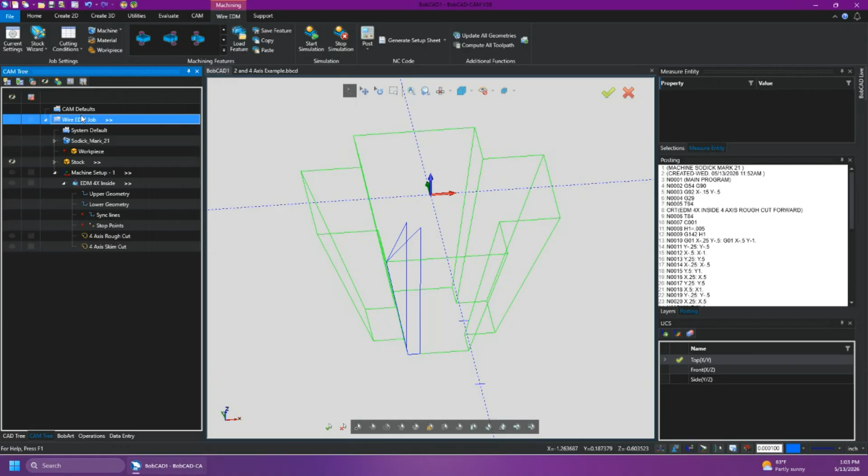Starting with 2-axis wire, things can be pretty straightforward. So if we just set up our geometry right on Z0 here, we can customize this a little bit. I'll say something like that. Go ahead and hit OK. For 2-axis wire jobs, even if you're cutting a tapered job, this is sufficient geometry to go get that set up.

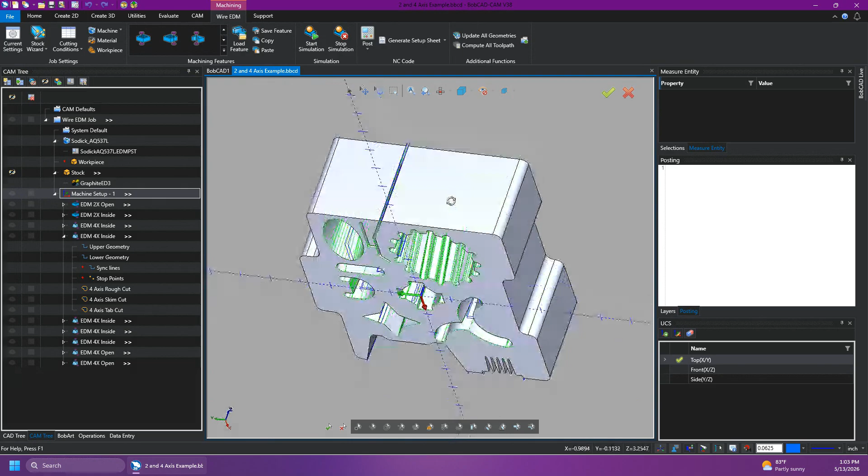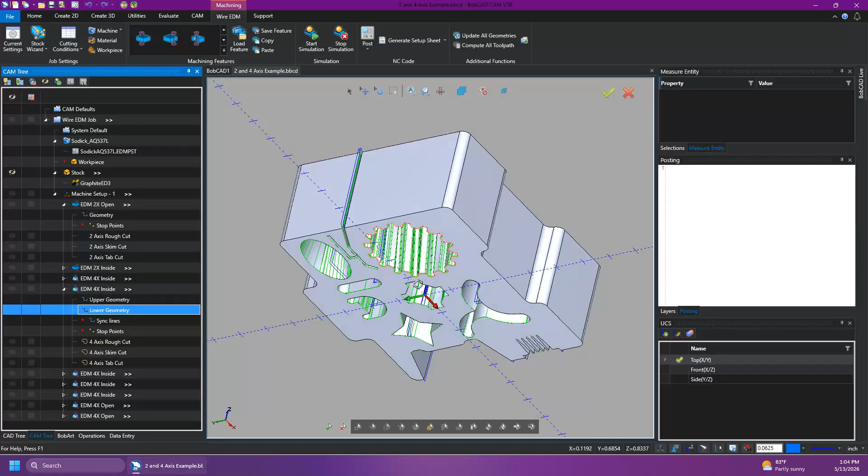You don't really need a full solid model for setting up a wire EDM job. Sometimes it's helpful to have that, so you could pull chain geometry from the top and bottom edges. If we're looking at the stock here, it represents our block, same thickness and everything. But when you're setting up these parts, 2-axis is just 2-axis geometry. It's a single chain on one flat plane, whereas on 4-axis you have upper and lower geometry. So sometimes having a solid so you could use something like extract edges and pull geometry from an existing solid can be helpful, but in this case, starting with a 2-axis example, this is really all we need.

So we can get started with setting up our wire job. Go to new job, select Wire EDM. Let's go select our Mitsubishi FA series just for fun here.

We'll go to our stock wizard. We don't have a workpiece to select. This is something that in tech support calls people ask me quite a bit about. You'll notice right now I can't really go and select anything, and that's just because this workpiece selection is looking specifically for a solid model. This is useful when you're setting up simulation - you can kind of see the deviation between what the solid model looks like and what the actual toolpath is going to do to that part. Right now we don't have a workpiece to select, so we'll skip past that.

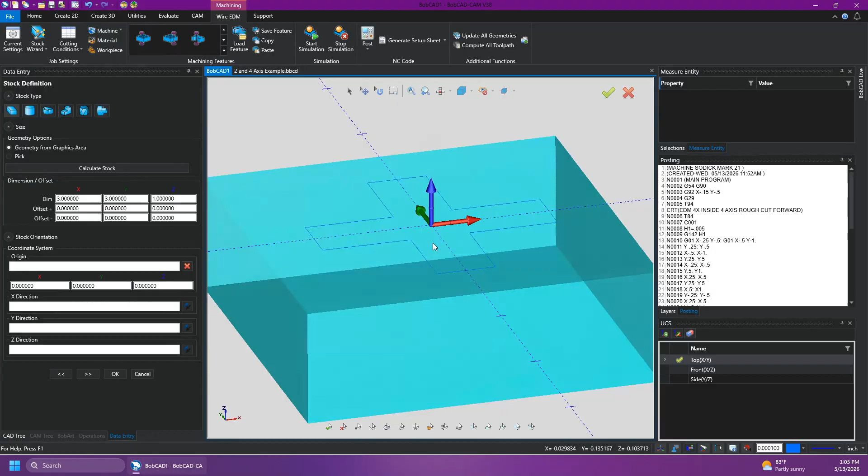We'll set up our stock. Let's go a little bit over. We'll do some different things in here. We'll make it an inch thick, that'll work for me just for this example part. We'll get to this more exciting example of a solid model later - obviously you can see this is a little bit more feature rich, but just getting started with 2-axis, like I said, you really don't need anything too crazy. You can just stick with this 2-axis wireframe geometry or 2D wireframe geometry.

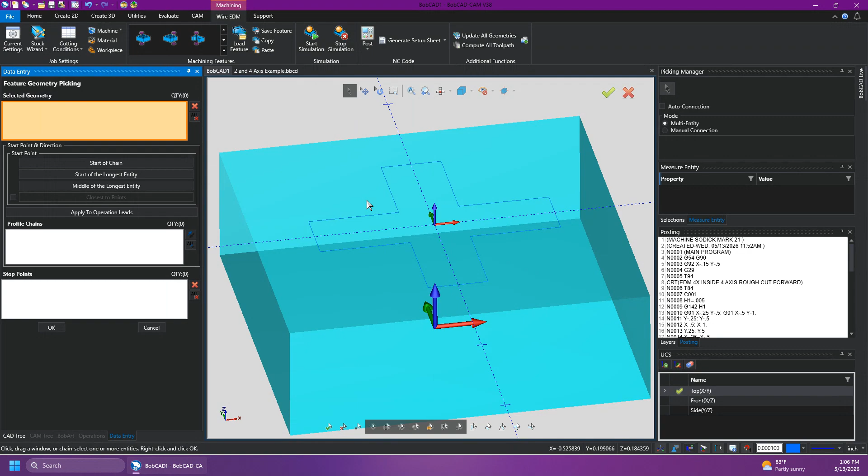And we have our feature geometry picking here. Now this is where if you're kind of used to the software, what I'd call a seasoned user, an old school user - before our picking manager existed, we would hold shift and click on an entity and it would pick everything, versus right now if I just go ahead and click on that while not holding shift, we're just getting single entity selection. This can be confusing if you don't know what you're looking at here. So we also have this picking manager right here, and this will allow you to either auto connect chained geometry, which usually just means it's touching in some way.

So if I click that, it goes ahead and picks the whole thing, and I didn't just hold shift to do that. Most of the time I run this without that on, just because I've used the software long enough to get used to shift clicking. And your picking manager should always kind of remember the state that you last used it as well.

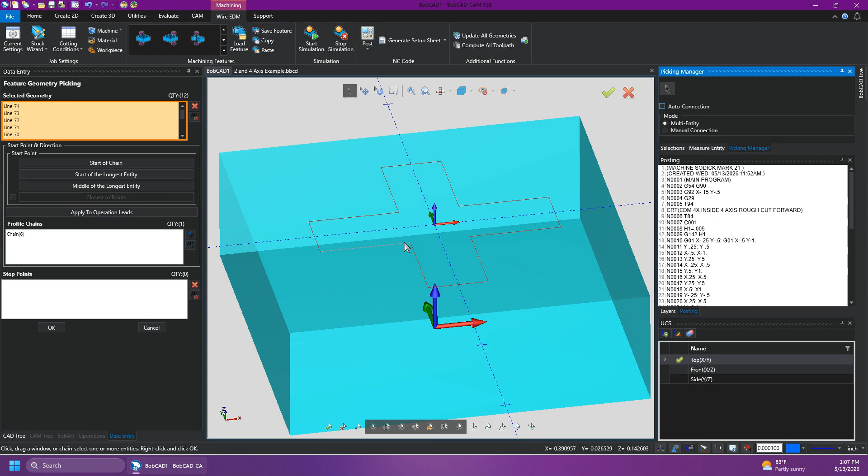So in earlier versions, 37, this would kind of reset itself. Nowadays, it should work very similar to how you're seeing it right now, where I leave it off, I could exit this function, come back into it, and it will remember the state there. And so if I hold shift and click, we'll do that.

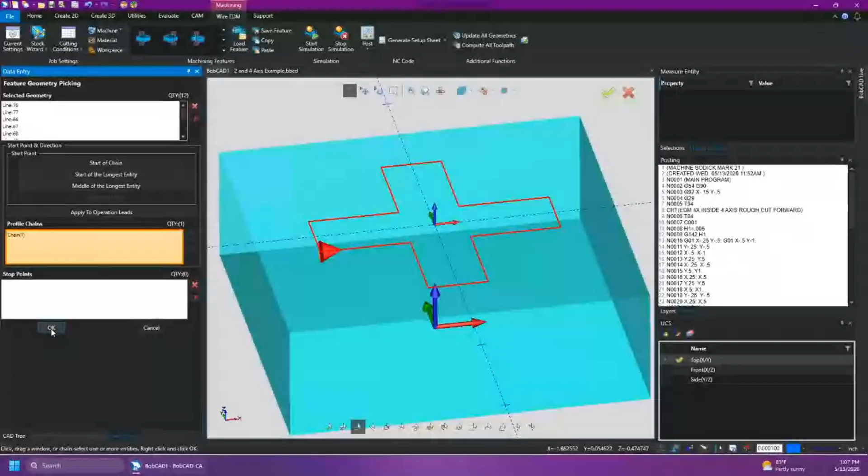There we go, that's our chain. We don't have any stop points that need to be selected on this part, so I'll hit OK. And as you can see in here, if you haven't been using version 38, this is one of the reasons to start—without hitting compute, without setting really any parameters, you could already see that the toolpath is generated. We get a good look around there. That's all done already, just by selecting the geometry inside version 38.

And in 37, we have the old CAM wizard. This is kind of the new style where we're using the data entry tab and we'll continue through. So we'll turn off glue stop, and continue working through here. You can see it's already thinking about the changes that I'm going to be making here. And this is kind of an important spot to touch on real quick while we're in the 2-axis wizard here.

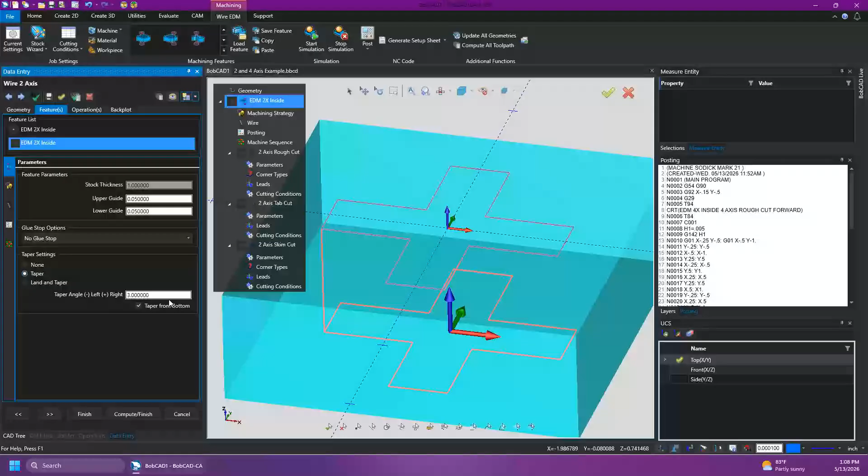A lot of people think if you're doing any kind of tapered part, you always need to have a 4-axis, and you need the top and bottom geometry, and you need the sync lines and everything set up. You can set up taper operations, land and taper, and it's going to be based on degree values here, right? So if we look from the top down and maybe change some of these values, we continue on here. As we get further into this part, the toolpath preview is going to show us those things happening.

And so we'll just leave it a rough and a skim. That's cool with me. Not really going to be making too many changes in a lot of this stuff.

If you're ever looking for your wire diameter or your wire settings, those are going to be in your current settings. We'll kind of go back to that because there isn't really a way to change that in this wire window right here. We'll continue on through posting.

Not going to be changing anything here for how the post output is going to be looking. We're not changing our work offset or anything like that. Our machine sequence, we'll just leave it to closest as it's a single chain. We're not really doing a sequence of shapes or anything like that.

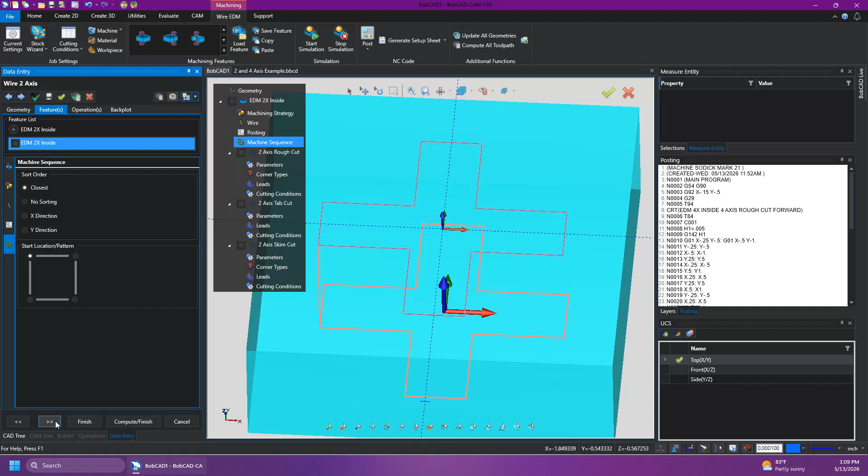And we'll go on to our parameters here. And you can already see the difference in the geometry. If I get a top-down view, you can already see this is kind of what I was talking about with that taper, right? You can see the geometry that I selected is right here, and we have the taper being applied from the bottom, which is exactly how we told it to do it.

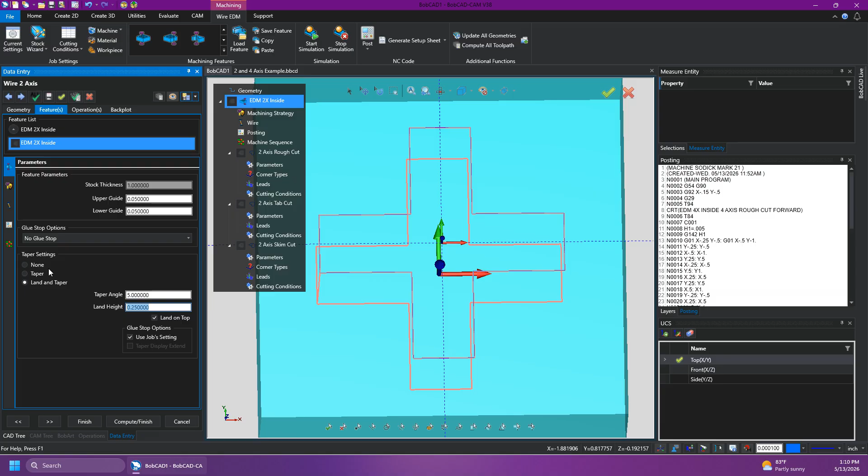It's also taper from the top if you don't do that, if you leave that unchecked. And you could also do a land and taper operation where you'd specify the land height, and specify whether the land's on top, and the same thing with that taper angle. So if you're doing something with a land followed by a taper, you could still do that with 2-axis wire EDM and still just with 2D wireframe here.

So a lot of this stuff gets a little bit simpler once you understand what you're looking at, what the options do, and what things do to your toolpath. For this setup, we're going to just go back to none. I just wanted to show that taper angle in there once we got started on setting up the toolpath. So we're not going to do coreless, but we could do coreless.

We could compute coreless, and we'll give this a sec here. 50% step over, that should take just a moment.

And so we have a few people in here. Are you guys wire users? And if so, are you guys using version 38?

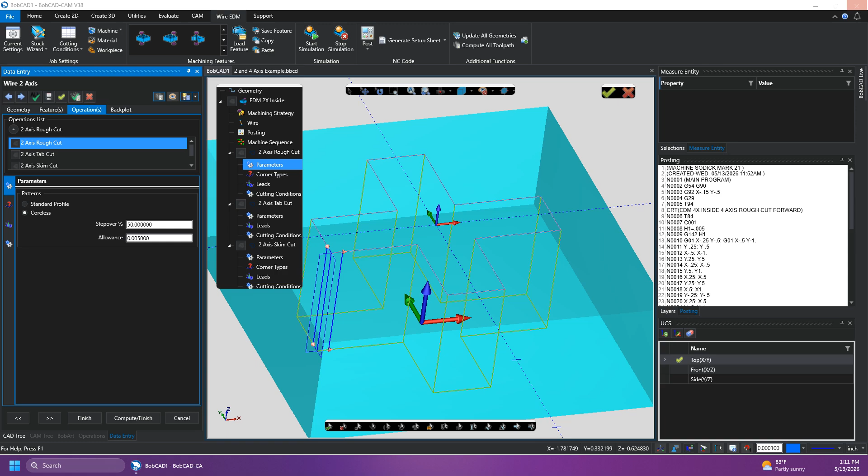Seeing if we could get anyone chatting with us here.

Bear with me one second.

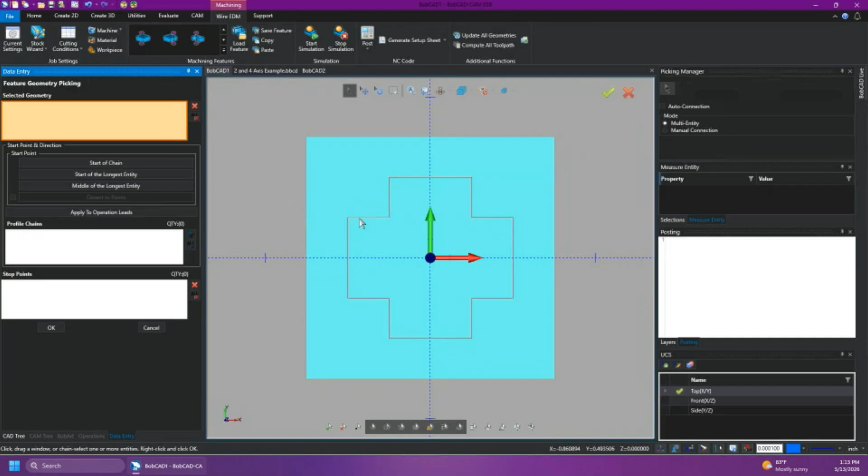All right, so right back into that toolpath. Apologize about that, I canceled out of that operation. Go back to inside, pick our geometry. We'll double check our chain.

We'll get right back to where we were. Let's remove our glue stop. Get right back to where we were at. So this is where we were kind of at.

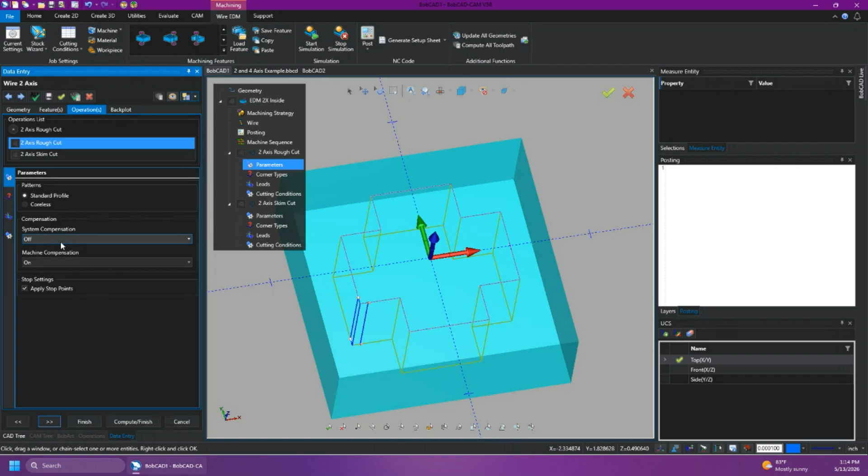So system compensation by default is going to be off. A lot of the wire users that I talk to say they really don't even use the system compensation, it's more just the machine compensation, so the changes that they make can be made right out at the machine.

Apply stop points. If this is checked, it's going to apply those. Obviously, we don't have any stop points selected right now, and so we'll go continue on.

For corners, external and internal corners, these are options to change how corners are processed on your part. So you can kind of see it's highlighting some geometry where it's seeing those changes could be made, and you'll even see the little changes being made if you're using certain options in there.

This is for our lead-in, so if your machine allows, auto feed threading and stuff like that, thread vertical. We could set up a hole right here as well for the diameter of the hole that it's going to be threading through. And then you have a whole bunch of lead-in options. This is mainly what people are coming to the leads page for, is how can I have this lead into my part? So we have a whole bunch of different options.

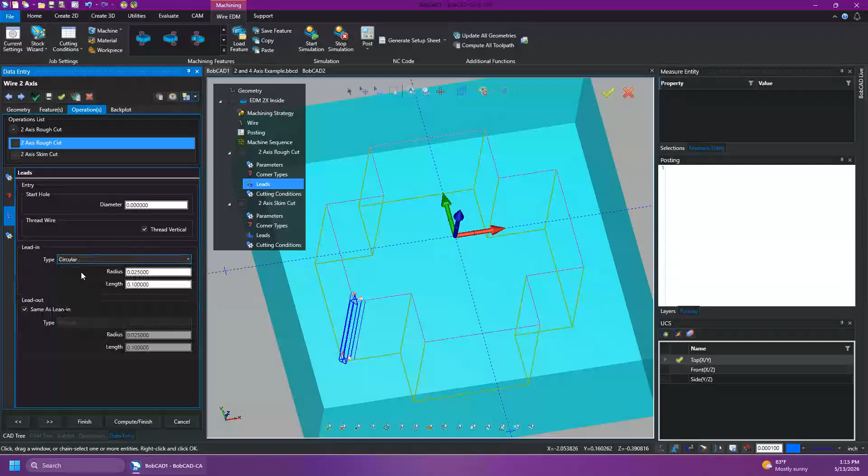By default, it's going to be set to perpendicular like we see here. We can go to circular, which on certain inside cuts like this might not be the best option. We'll be getting outside the part a little bit there. But you can change the values to really whatever you want. We'll set 40 thou instead of 25 thou.

There we go, excuse me. You can change the length, maybe we'll make that 40 thou. And you can see how that change happens right away without having to go compute the toolpath like we used to have to do in the previous versions.

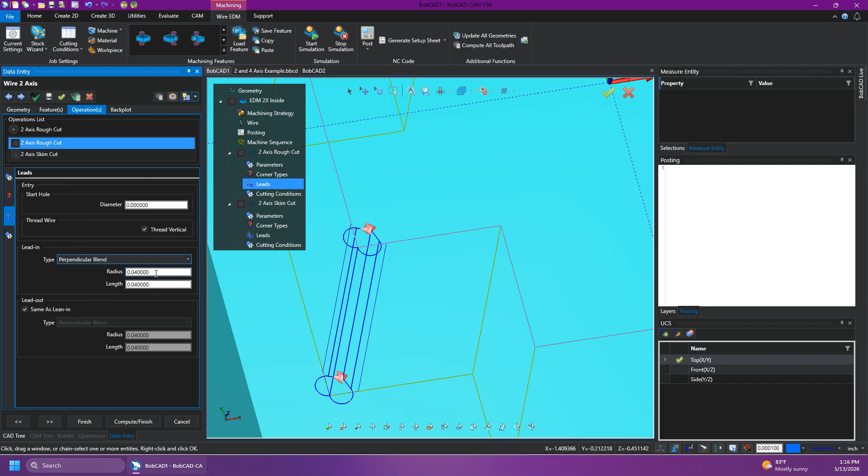We got that perpendicular blend where it's going to kind of try to do some kind of arc radius in addition to the perpendicular lead-in, lead-out type. So we'll see perpendicular here. We have parallel where it's just going to continue, extending from the front, the start of the chain, and exiting out just parallel with the lines that it's cutting. So in this case, perpendicular is probably what we're going to want to leave it on.

We also have a select point and point blend. Select point would allow us to pick a point, say we're somewhere over inside of where this part is going to be getting cut, and say we got a point right here. It will lead in and lead out from that position and move back and forth to that position, and point blend, you can kind of see this just with the center point here.

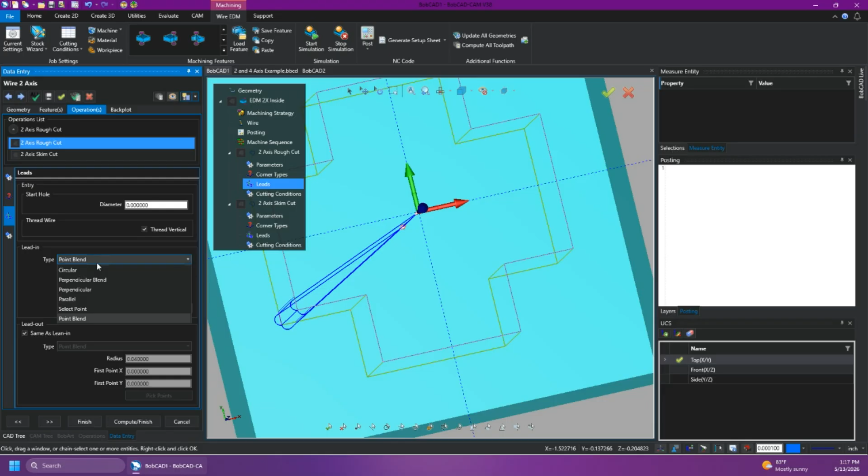Select point goes directly from that position to a different position. So we have our first point X, first point Y. If we change these values, it's going to shift that point around, and you can see what I mean with the blend, where it's always going to try to do some kind of arc included in that. So we'll leave it on perpendicular. We'll be starting from that corner, finishing on that corner, and that should really be all we need to look at there.

Getting into our cutting conditions, some machines will have a cutting conditions database assigned to them. If we finish this for just a moment, I'll kind of show you where you'll see those things. So we have our Mark 21 picked here, and you can see this is linking to the Mark 21 EDM cutting conditions database.

Now, from a whole lot of feedback from customers that I work with doing technical support, a good majority of the machines nowadays are allowing you to set the cutting conditions for whatever material you're cutting and things like that right at the machine. You load that up right when you're loading up your G-code program.

In some cases, you'll see that this isn't using a cutting conditions database. A lot of times that's just due to the setup you're using. So just wanted to mention that if you don't have that as an option, more than likely that's why it's not tied to some database in the background. If you have questions about that, you can always talk to us in support.

So we'll continue on here and get to a skim cut. A lot of this is going to be just the same stuff. Skim passes have a couple different options here. You could flip the pass direction, skim in the same direction, reverse skims, and choose how many skims you want to do. And then the same things really that you're seeing in the parameters up here.

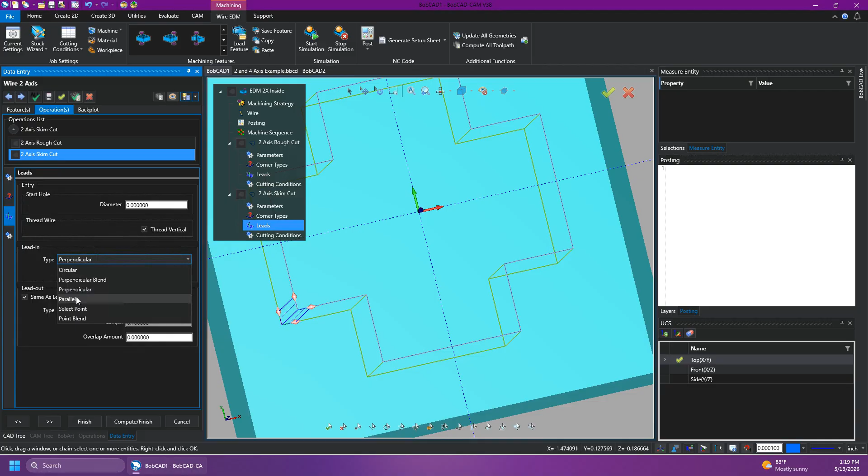We'll do parallel and you can kind of see how that'll feed in simulation. We'll leave that same for the lead out. And the cutting conditions in this case are just going to be whatever is linked to that database for this Mark 21. We'll go ahead and compute.

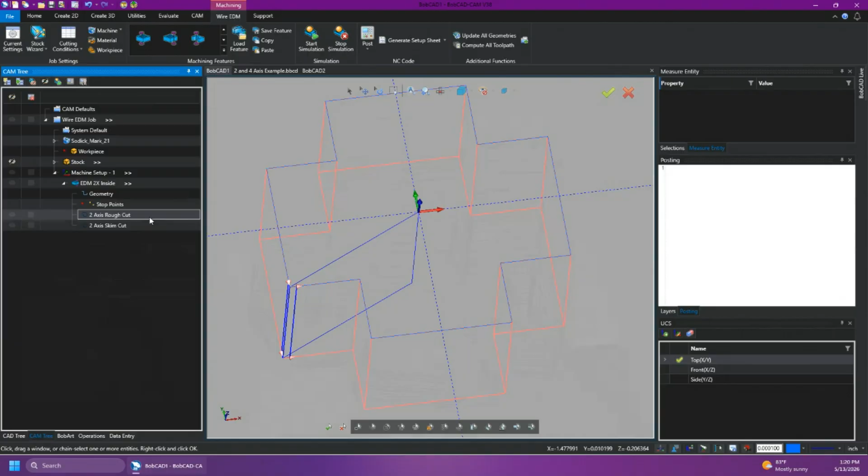You can see that toolpath is the exact same thing that we were looking at before. Nothing really changed from what you're seeing inside the CAM Wizard nowadays to what you're seeing once the toolpath's been computed. So here's our toolpath. You can also see it's kind of showing you where everything's being seen as a corner, with these vertical lines here.

2-axis wire doesn't really need sync lines. That's why you don't see the choice for it over here. 4-axis does have the option for sync lines, and we'll get into that in a little bit. But version 38 is getting pretty advanced with how it's recognizing the parts and where it's supposed to sync up. A lot of times it's based more on the chains that you pick, similar to the chain we have right here for the top and bottom geometry.

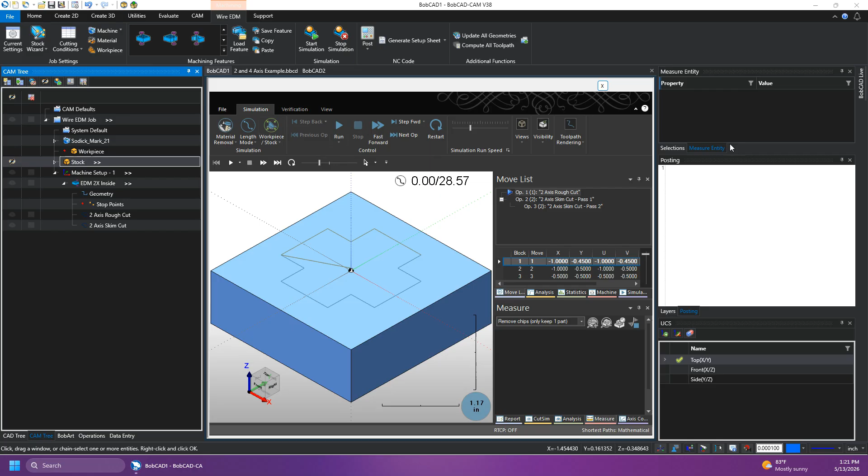For this one, like I said, this is kind of a simple part, just as a run through of a wire EDM 2-axis job. We'll go simulate this. There we go. So we'll go ahead and run. Give us a little more room here. There we go. So it's basically just tracing what we just saw there.

Right now, you don't see a ton of good information on this. You're just kind of looking at the top and the bottom. So, little tip for simulation here. A lot of people, when I'm doing tickets and things like that trying to verify the toolpath is looking good, if we're cutting out many pieces or whatever the case is, we have a couple of things in here that are well worth knowing about.

So the first thing is inside of our measure tab here in simulation. If you're cutting out many parts and you kind of want to see the finish on one example or something along those lines, you can do that right now. Like I said, you can't really even tell that a cut's been made aside from the black line. We can't go look in there too well and see how this thing cut.

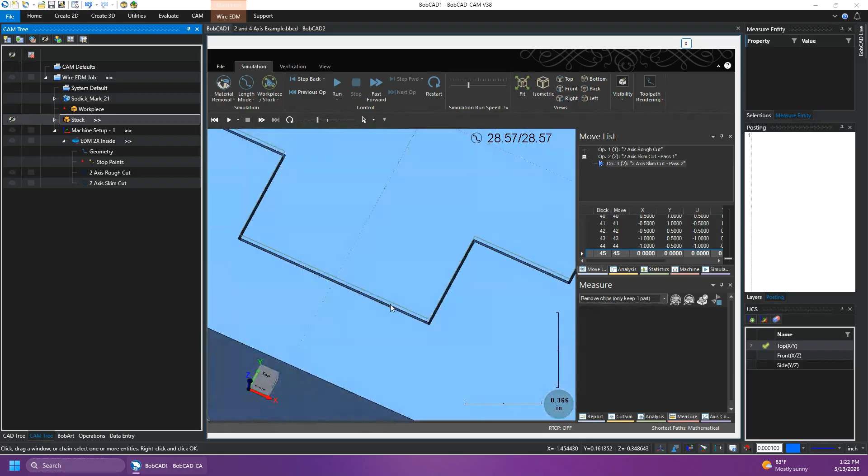So in the measure tab, you have all these different measurement options, and you'll see some of them are remove chips. So if I select remove chips, select chips, I could go click through and select the things I want to have basically disappear or be hidden. Remove chips, only keep one part, is the main one that I use if I'm looking at a kind of specific example.

That's the one we're going to be using right now. You can see the other ones there, auto-defined targets with tests based on volume. Only keep one part really allows me to select the main thing that I want to see.

So in here, we kind of just have our cube, but if I click, and I have just a regular mouse, left button, right button, and then I have the scroll wheel. If you click your scroll wheel on the part that you want to keep, just like that, you can see that's what our cut is going to end up looking like on the inside.

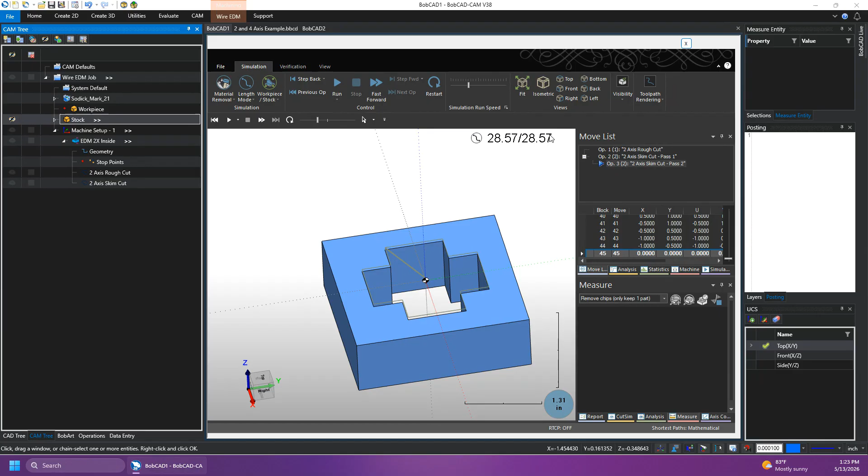Now this gets a little bit more fun with the 4-axis parts, where you can see the actual spiral cuts and tapered cuts that you can end up making with that. If we exit our simulation here, just go to File, Exit, or just click that little X up there. Get back to the interface.

Let's throw a taper on this just for fun. This is something that people ask me about in tech support sometimes, and you can end up getting some more advanced parts from just simple 2-axis geometry. So we'll set maybe a 5-degree taper angle. Our land will be on the top, and we'll set it down a quarter inch. This is a 1-inch thick part here, and so we'll continue through.

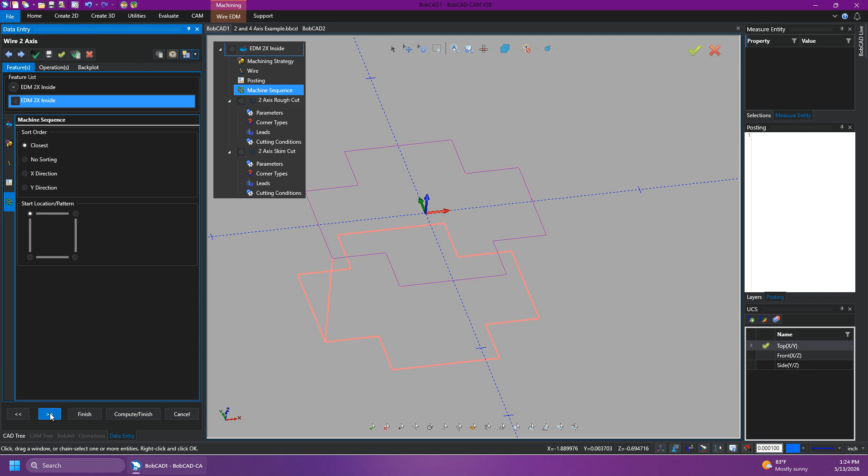And you can kind of already see we're doing the initial cut, and then we have the taper cut following that. So we'll apply the taper there. Let's continue through and pretty much just compute this. You can kind of see it breaks it up into 2 separate toolpath operations. Let's go simulate that.

There we go. We can slow this down a little bit. You can kind of see what it's doing here. And actually, we can go ahead and make our stock transparent so we could really see what's happening in here. There we go, so we're doing our taper cut.

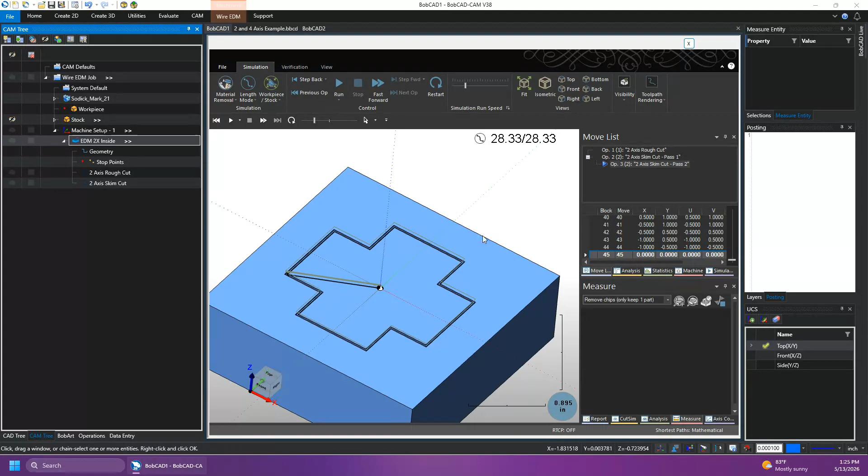And then we have our land cut happening following that. So if we turn our stock back to show, and then we keep our one part, you'll see we have our part applied with our land at the top. You can kind of see it. The graphics there are maybe a little bit difficult to see in the recording, but there's a clear line right here where our land should have ended.

And if we look from this side, here we'll go look at the bottom view here. You can clearly see the taper applied there as well.

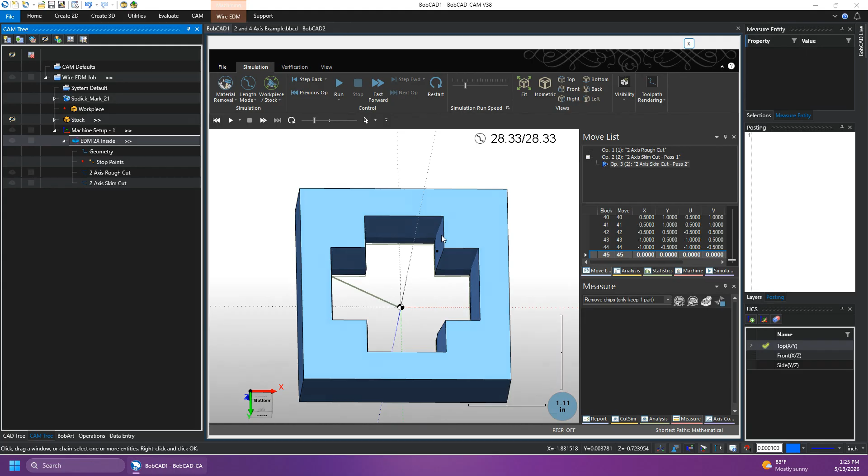So that might not be the craziest taper angle or the most complex geometry, but like I said right at the beginning, you really don't need crazy complex geometry. You really don't need a ton defined when you're doing 2-axis wire EDM cutting. Have your 2D wireframe, make sure you set your stock up correctly based on the part that you're cutting, and then go have fun with setting up those land and taper settings. You can do just tapered cuts. The 2-axis world is your oyster at that point.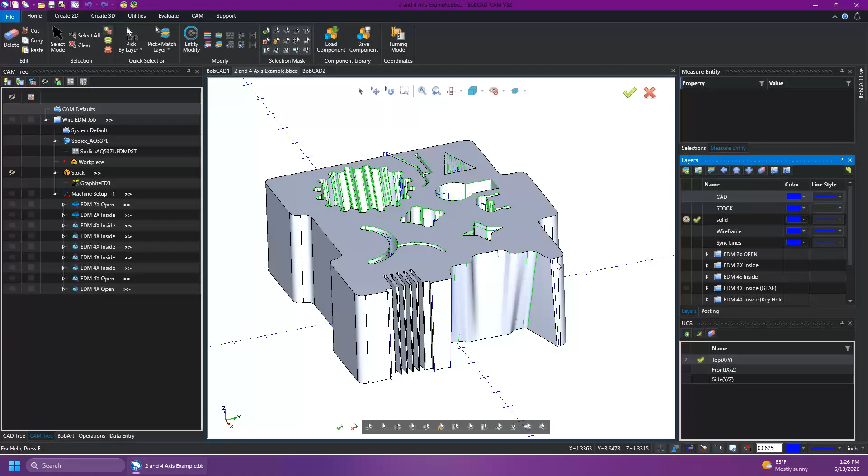So we'll get out of this 2-axis and we'll go into our 4-axis. Drop this back down, and you can see this is kind of what I mean with the solid model, right? Say you don't have a whole bunch of layers with all this geometry already parsed through. If you just have this solid model, this can get a little bit intimidating maybe for creating some of these features. We have 2 completely different profiles on some of these, say like this shape at the top and this shape at the bottom.

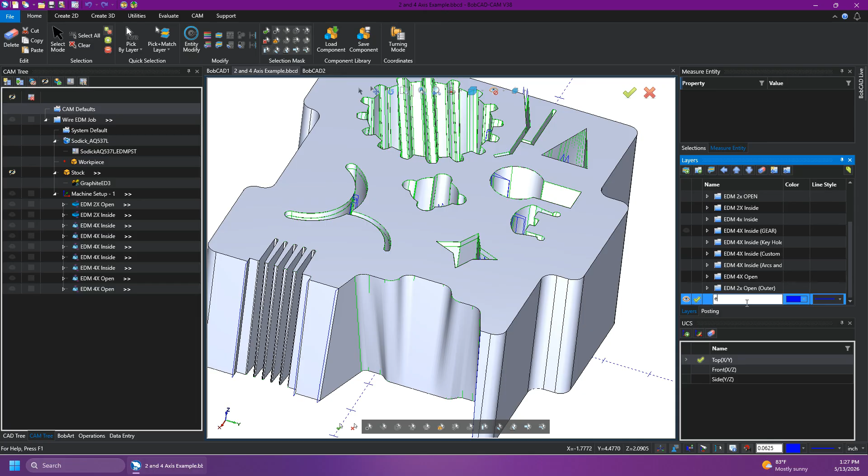Well, just in case you're not aware, you can always pull geometry from solid geometry, and I mean pull wireframe geometry. So just as an example of that, we'll call this extract, because I'm going to go extract some edges from this. Let's hide everything here too, we'll just get rid of all of our toolpath and everything there.

And from here, we can turn off our solid, turn it back on. I don't know what just happened with our stock there, let me just refresh this. This has been open all morning. Close that out, there we go. All right, so let's just go add our layer back.

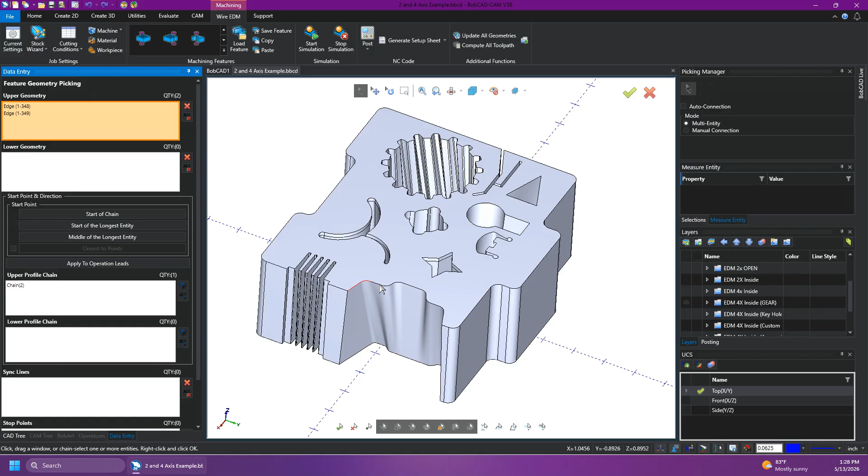We'll hide all that stuff. There we go. So if you're ever trying to pull geometry from an existing solid, you can pick solid geometry for this. If we start an outline or an open, you can pick this geometry, but in some cases it's not the easiest, especially if you have close by geometry.

Something a lot of people don't seem to use often is selections. I'll show you here. We'll call it extract 2, and I can show you how selecting these things could be made a snap quicker than it currently is.

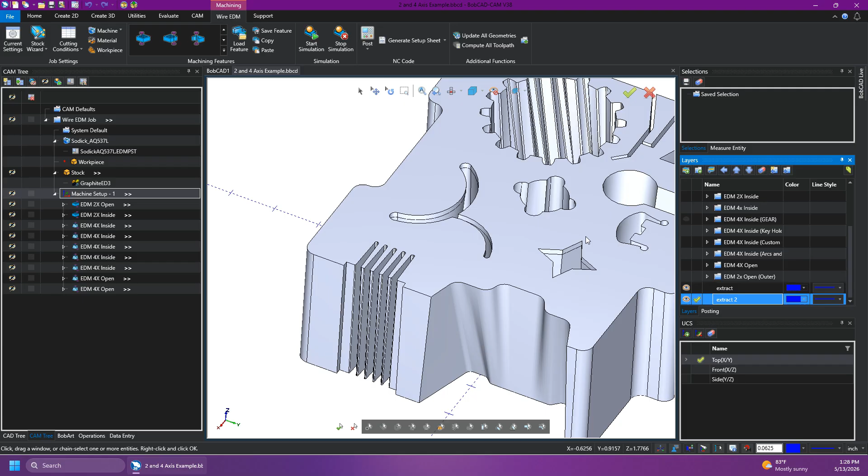So we'll go to our extract layer and make that our top extraction from this profile here. We'll grab some of this top profile geometry and work our way around. I could use auto connection, but because there's so much stuff on the same Z level, it might be overpicked, so we'll just manually pick this stuff.

Grab you, and you. We'll just work our way through like that.

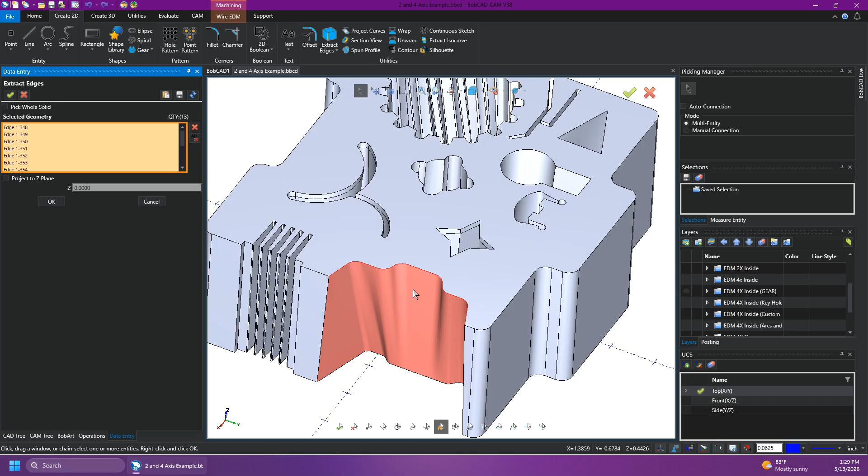Now there's the option—this confuses some people—project to Z plane. This means that this geometry, say if you had something like a helical move, take a thread that goes down in Z. If you project to Z plane, not only will it project to that position, but if I put 1 inch or 10 inches in here, you'd see this geometry pop up somewhere above this. It creates wireframe geometry made up of usually lines and arcs, which is what you'll pull from most solids.

Some solids will have spline geometry if you're working with complex shapes. Project to Z plane will also flatten your geometry out, which can be a nifty feature if that's your intention. If you don't want it messed with, leave project to Z plane off. We'll hit OK, and as you see, that just grabs that profile from the part and leaves it in that position since we didn't project to Z plane, and this was already flat geometry.

So now we have that extract right there. We can do this with the bottom. I turned off my extract on top—it shouldn't really get in our way, but for good layer management I usually like to turn stuff on and off. So we'll extract this bottom surface here, the bottom profile of that surface.

It looks like we might be missing a little tiny segment. Nope, just the graphic showing us little stuff here and there. We'll just continue around and end up there—same thing.

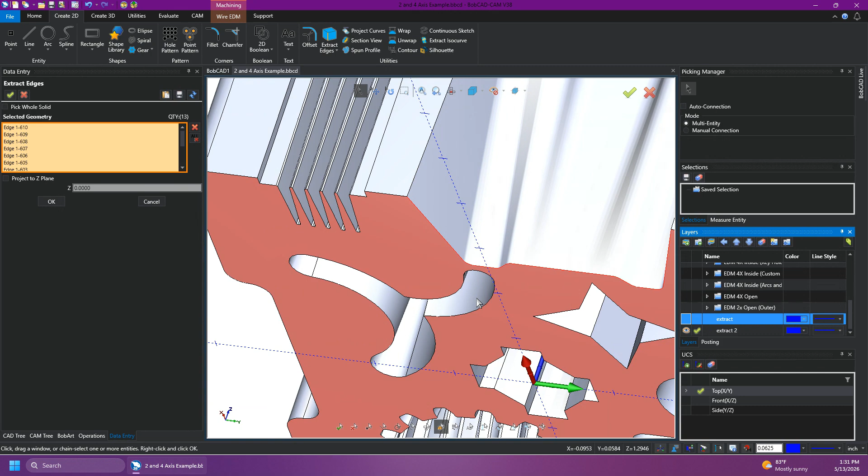Hit OK, cancel. Now we can see that we have both of our profiles here, just like that.

Say I wanted to do something with that—we don't have a surface that exists right here quite like this one. Another thing, too, is you could just pull that geometry directly from the surface. Let's go throw extract 3, maybe save ourselves some time next time.

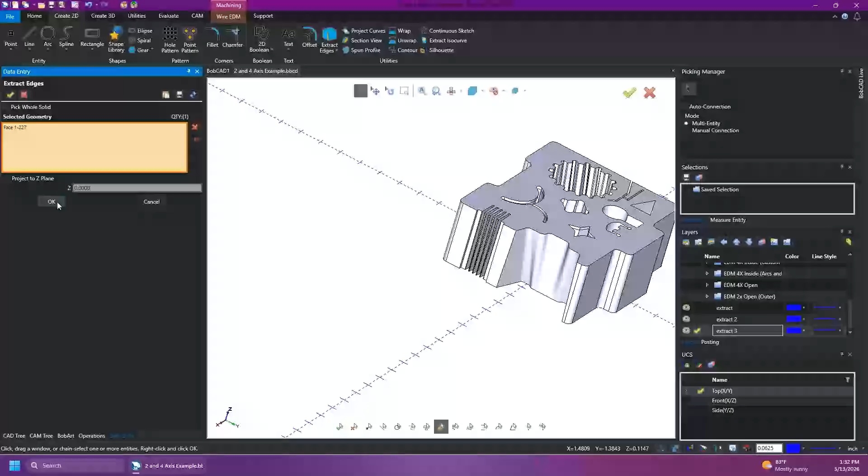If we grab that surface and then hit OK, and we're not projecting to Z plane or anything like that, we'll hit OK there, then cancel. You'll see that pulled that whole entire surface geometry.

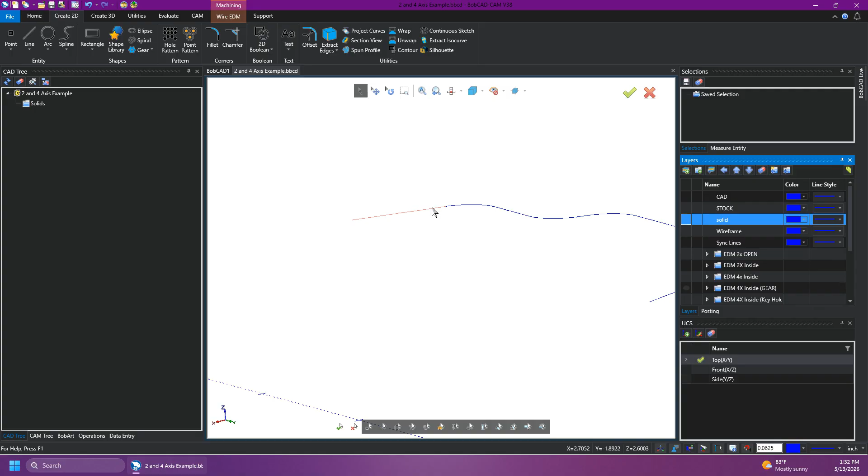The main thing I like telling people is if you're not using these, and you're often working with profiles made up of a whole bunch of different chains of geometry, or multi-entity chains, you saw how long it took me to individually pick that stuff a moment ago.

We could pick this and never have to go pick everything individually again if we use selection. So this is selected here. If I hit this save button on my selections menu, now I don't have to re-pick that. Using our picking tool, selections, you see that just picked that whole entire chain of geometry with one click.

Not a lot of people I see are using this, but it comes in handy quite a bit with something like this with wire, where you are picking those chains. Even with our premium tool paths, where you're picking drive curves and morphing between two surfaces or two curves, it does have you pick chains as the geometry for setting up those tool paths.

This can be a lifesaver if you're working with a profile or a chain that has a ton of entities in it. So with this one, we can go here—we'll just do this, start a brand new file.

We'll go do some 4-axis stuff, but we'll copy that geometry over because we could get to all of these tool paths and kind of individually look at each of them. But we'll just do a quick 4-axis setup here. So if we paste... oh, I must not have hit copy on that. Sorry about that. We'll copy, we'll paste. There we go, now we have our upper and lower geometry here.

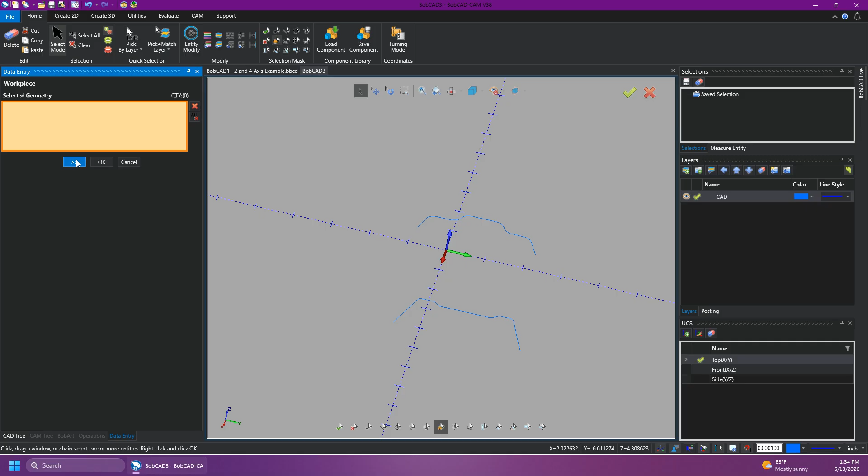So we'll just do a new job. We'll do the same thing, we'll use that Mark 21. We'll go to our stock wizard. We don't have a workpiece here. Once again, I'll show you the benefits of using a workpiece inside of simulation as the main place you're going to see that. But we'll continue on here. Set that up there. Cool. That should be good. No, that should work just fine, actually.

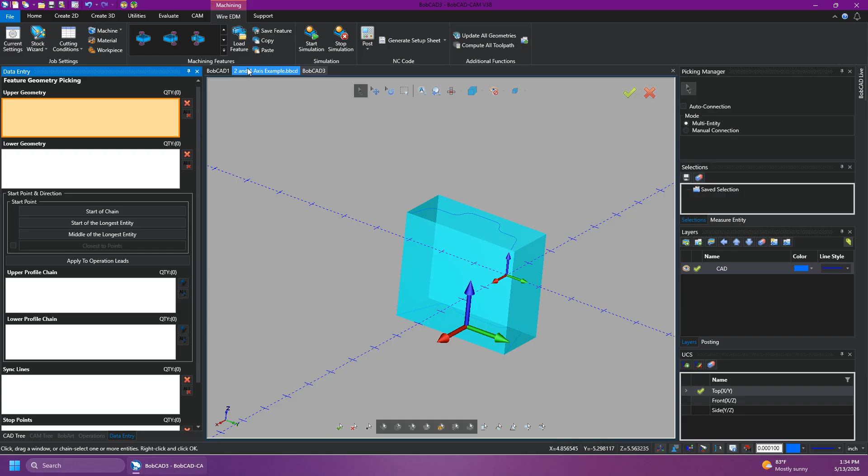So we'll continue here. We'll set our origin at the bottom for our lower guide. Then we'll go do just a 4-axis open. And so here's really where you could get speedy with things like this, because those selections I had made were saved on the other file. So right now we could quickly do that. But that's where, if we have those selections here... I'll just cancel out of this.

We'll go do the selection. So top, save, bottom, save. Right, so when we go and select our geometry, this might not be the craziest, most complex geometry you could run into, but now we have that selected. And for our lower geometry selection, now we have that selected without having to draw a box or make changes to what layers are showing up or anything like that. So we'll just make sure our chains are kind of going the same way. We hit OK.

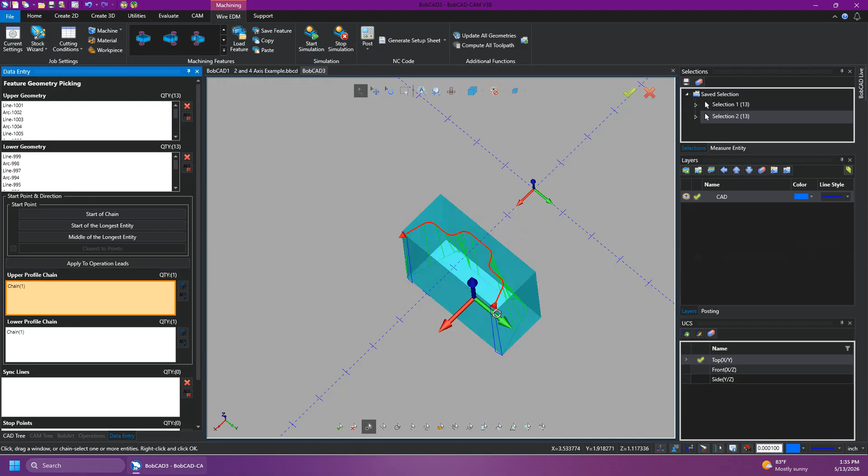And it looks like there might be some flipping here. Let's see, let's remove our glue stop. It looks like maybe those chain directions were a little bit backwards. Let's go here. There, and there. Maybe I'm missing a piece of geometry. We'll go next. No glue stop.

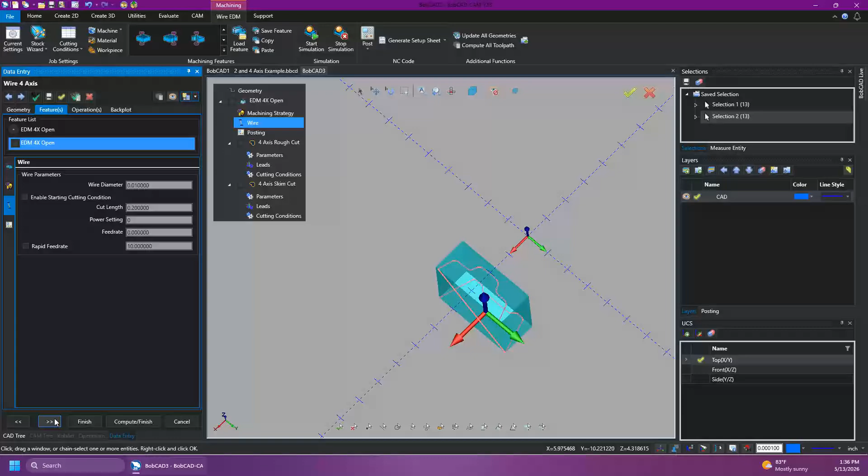There we go, let's try a rough and a skim. Now this is a pretty complex surface we were just messing with there, but you can see that it kind of reoriented those sync lines once we got into it a little bit. Don't let the initial look intimidate you too much.

And you do have some options for syncing: by entity, by proportion, by closest. Right now we have the same amount of entities, but that should be just fine with different cases - sometimes by proportion will come in handy more than by entity. And if you just hover over things, if you have the tooltips on, this could give a far better description than I could in most cases, where it tells you the dictionary definition of what each one of these things means. You also can open the help system right from there. So if you see these tooltips, check out what they're talking about, and take it from there.

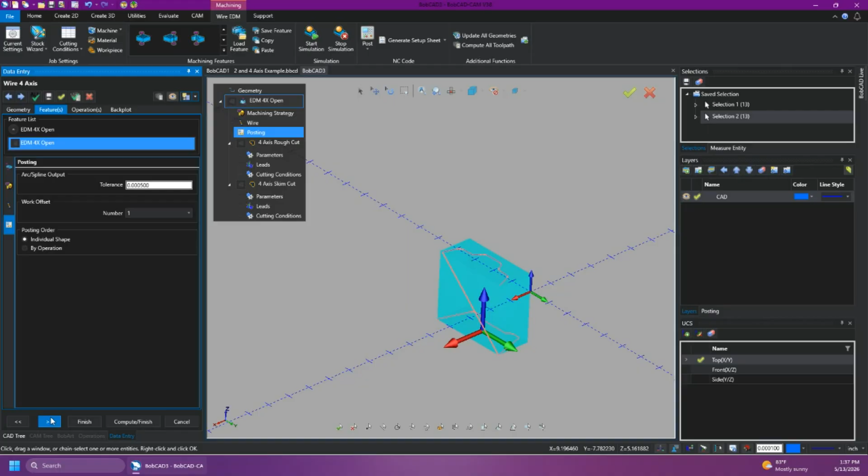Like I said, we're just going to do the rough and skim cut. We have our wire, 10 thou wire. Continue on, not changing anything for posting. Our parameters, we're going to comp, no stop points. We'll leave our lead in and lead out. For this one, honestly, a parallel probably would work just fine.

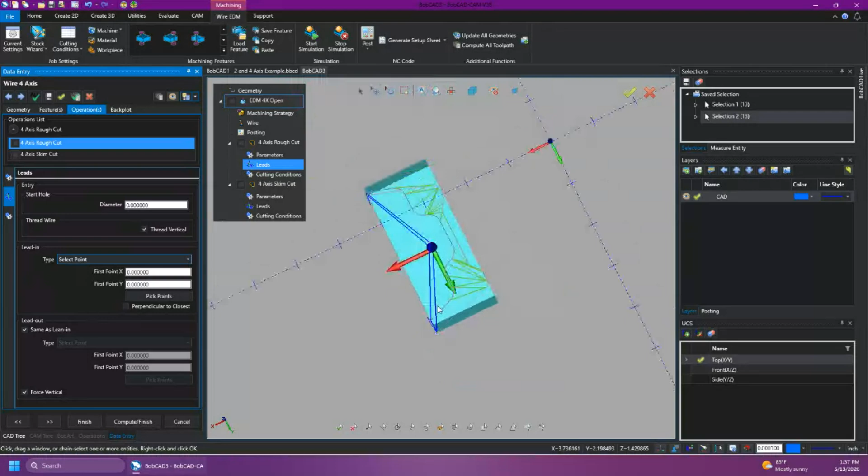Based on maybe some of that geometry that it's getting into... it's like, where is this going to? Right smack dab in the middle. So we probably don't want to start there. Maybe just perpendicular - we could just start one side, go to the other, and we'll continue through.

Cutting conditions, if it's linked, it'll say right there. Continue on to our parameters. Our skim passes, we'll do reverse skims again just to keep things exciting. System comp off, machine comp on. Get back into our leads, we'll just leave it on perpendicular. And once again, the cutting conditions selected right here.

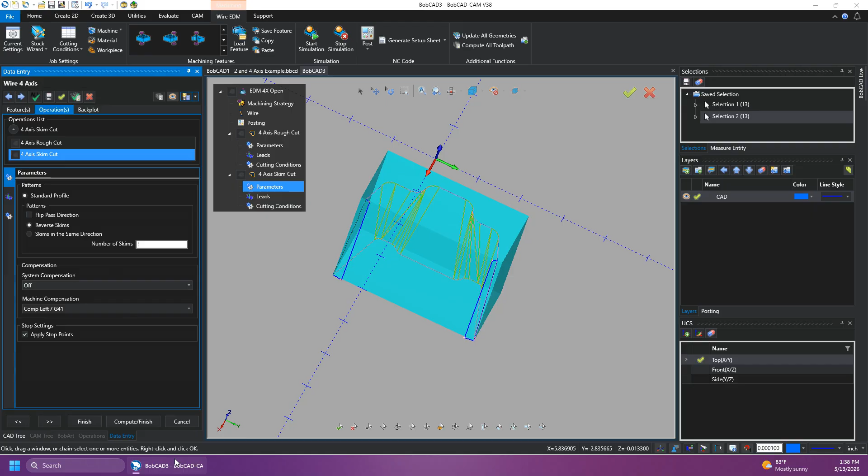Keep in mind too, if we have any newer users in here, you don't need to get all the way to the bottom of your CAM wizard when you're getting through this stuff. If you get here and you decide, yep, that looks good, compute it, and that's all you got to do - it'll keep everything else the same. Say maybe I did that a little too early and I want to go change my leads - you can always come back to it, but you can hit compute and finish anytime you want to.

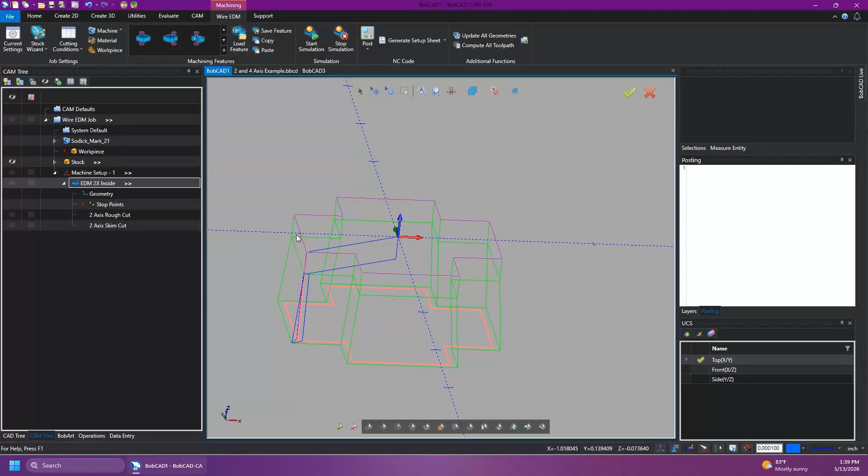Now, like we were talking about earlier with the 2-axis, we don't have any option to choose sync lines here because it's basically applying the taper. It's doing a calculation in the background to get that taper. With the land, it's just going vertical, straight down for the land to that distance, and doing some math in the background to apply that taper at the correct position.

Let's turn our solid back on. We don't need it quite yet though. You can see all these parts, and for most of these, even with this one we just copied, we have the top and bottom geometry selected. Let me check which one that is... there we go. So here we have our top geometry, our bottom geometry, and this one does have sync lines associated with it.

Let's turn all our other toolpath off. You can see there's our sync line selection. So that's manually going in and creating sync lines, just like we see here on this layer, for all of these different spots where we want the wire to sync up on the top and bottom guides.

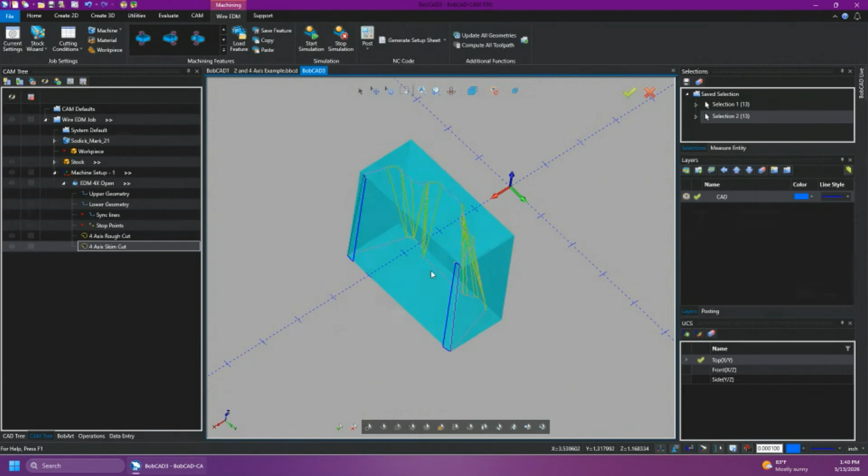BobCAD now, inside of version 38, will kind of recognize what you're trying to do between the top and bottom and give its best estimation of those sync lines so things stay synced up. In some cases, you might still want to add a couple if you're getting bad spots in your toolpath, or if simulation shows it marring the surface or doing anything you don't quite want it to.

Adding sync lines is just telling the software, hey, this is exactly where I want you to go do this, rather than saying, hey, you figure out where this is going to happen. That's essentially the difference there. So let's give this a quick simulation.

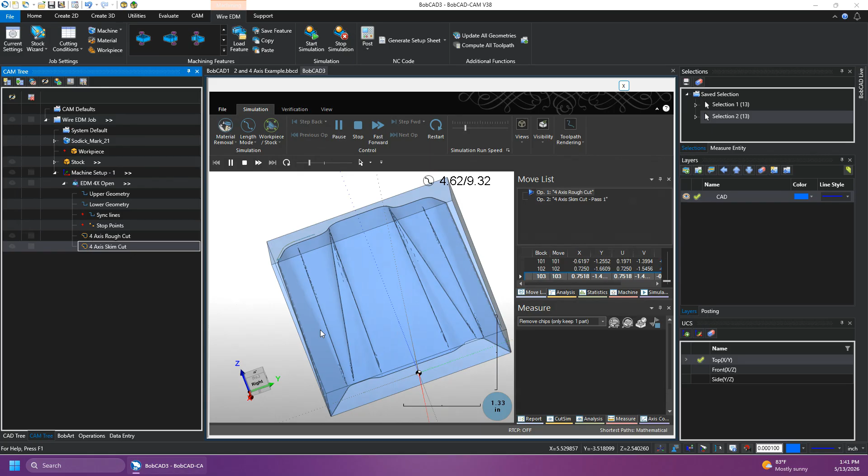We can run that. We're going pretty slow, so we can take a gander at how this is looking inside the part. You can kind of see how it's making those decisions using those sync lines, because you'll see it tilt one way, tilt the next way, and try to make the shape we're trying to make. Now this one doesn't have a surface because we just copied that top and bottom geometry, but I'd say that's fairly close to what that surface already looks like.

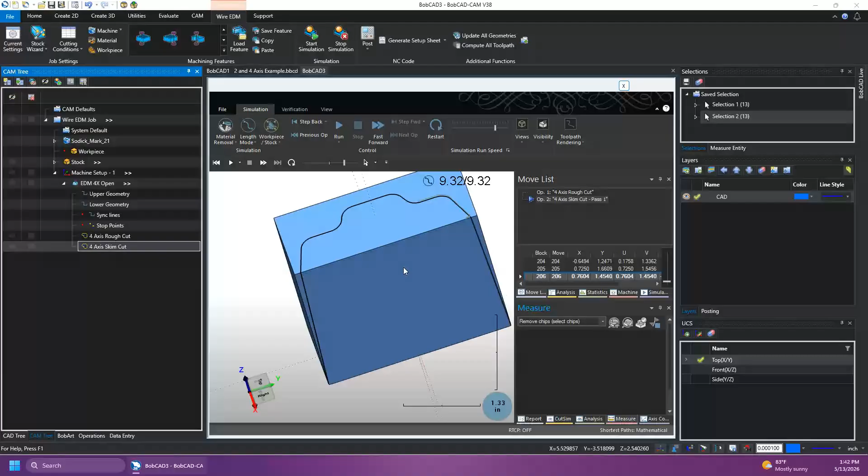Here, let's speed it up. We'll wrap it up with our skim. We'll turn on our stock all the way and show that, then do the same thing down here. We'll remove the chips — this time we can select the chips. In this case, we're not clicking on the part we want to keep, we're clicking on the part we want to remove. We'll use that center mouse wheel, and there we go.

So not quite exactly the same surface that we copied from. I'd definitely say some sync lines on that geometry would probably make that a little bit cleaner. But ultimately, that's a pretty close representation of what that other surface is doing, and that's without creating any sync lines.

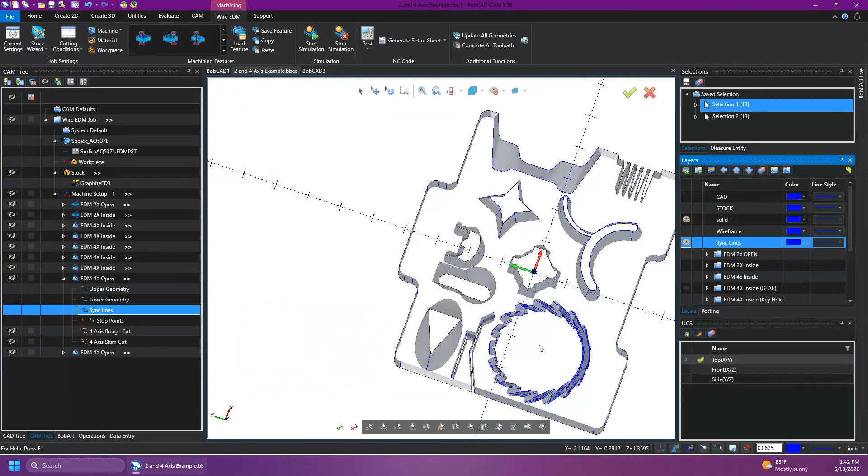You can see on this other part — let's exit simulation here — just how many sync lines are involved when you're doing complex geometry. Like we have this extruded, gear kind of shape, whatever this is supposed to be on our example part here. Press some Play-Doh through that, you'll end up with that. But you can see how many sync lines are involved when you have a part like this. Obviously this part is a hodgepodge of many different things happening.

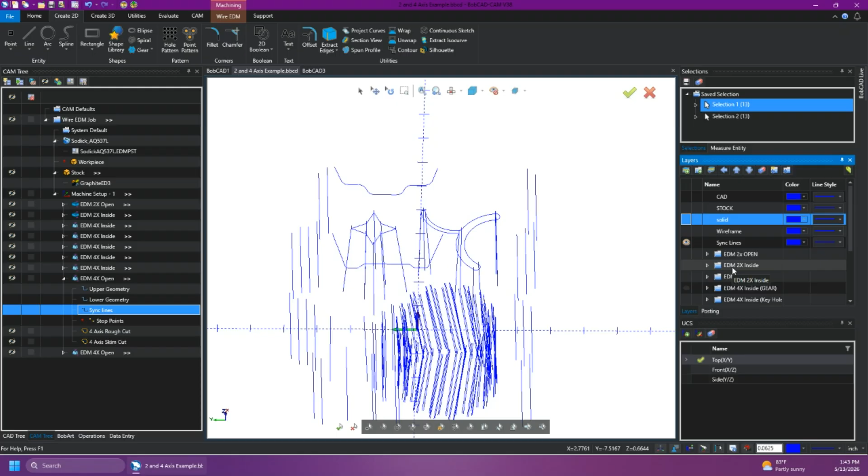But for the sync lines, if BobCAD's going to understand that these chains correspond together from top and bottom nowadays, you really alleviate a lot of that work of manually creating that geometry or manually pulling it using extract edges, and then having to show everything like we have here 2X open. This is all based on the features we have set up, just to keep it a little more organized. But it's one of those things — if you have those automatically selected and syncing up through the system, it saves a pretty significant amount of time.

And really, we could go look at some of these other pieces of geometry in here. We could turn off our sync lines again. So we just looked at this one here. If we just want to post that out, we could go look at how that surface compares. You can kind of see it is a fairly complex surface for this thing to be thinking about.

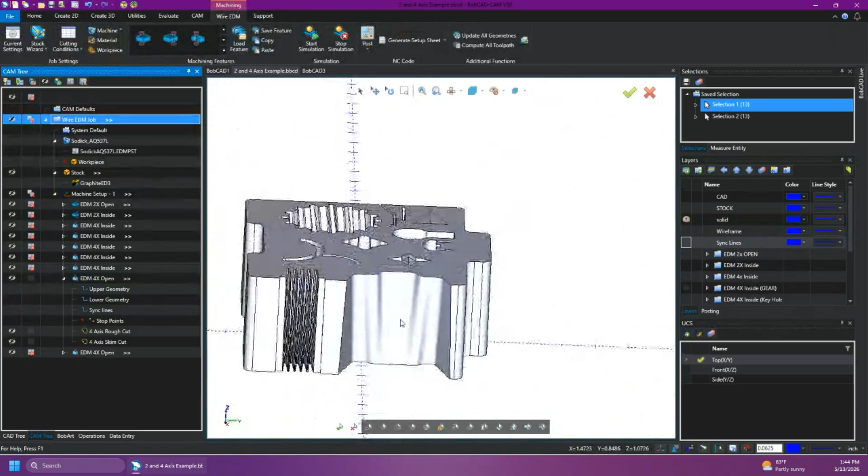There we go, we'll get rid of that. It's got a lot of changing features as it's going around that. Little jut out there where you don't jut out up top, and that's kind of what we're seeing in the simulation without the sync line.

So I'd say overall that got pretty darn close. If we want to take a look at it here with the sync lines, this is where they still come in handy, even though it's auto syncing. That doesn't necessarily mean it's always going to do things perfectly every time. So we'll remove that. We can see it's very similar, but in some cases, you'll still probably need sync lines.

We can take a look at some of this other geometry that we're working with here. A lot of people always want to look at our extruded gear. It's just a gear with a little twist in it, this shape here. Let's turn this one off. Let's see, this would be a 4-axis inside. There we go, it's always fun finding which one we're working with on here.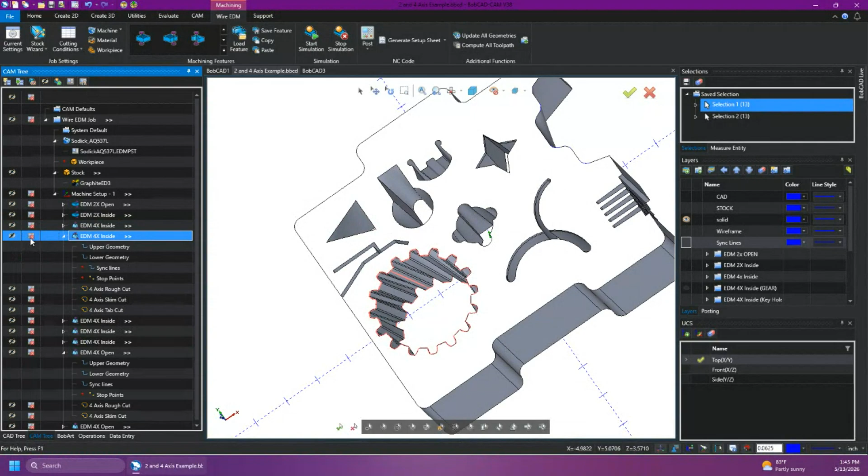Same idea, though, and you can see this one isn't using the sync lines. Sync lines are not selected on this toolpath. And you can see how it's generating those sync lines just based on the geometry that we're working with.

Now, we can take a look at other things here, too, like when we set these pieces of geometry up. We go look here. Let's go reselect that. There we go. Let's cancel out of this.

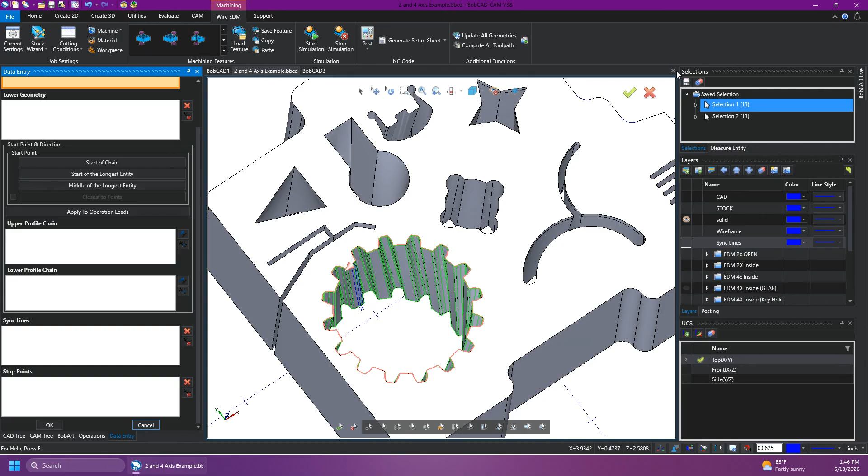Bear with me one second. This file is very heavy. No, we don't need to make any changes. We'll just pop that guy back open. Get those guys here. That was this guy.

So if you view this chain information here, we have our upper geometry, and this arrow is denoting our start point too. So that's our start point on this upper chain of geometry. You'll notice the lower geometry, you want it to correspond with that, so that when you're making these changes to the settings, by proportion, by entity, by closest...

You may end up with different results depending on which ones you select. Right now we're picking by closest, and you can kind of tell that it's understanding that based on the top and the bottom and the chain direction, we're starting at the center point of this arc and we're going this way, counterclockwise around the part.

We're doing the same exact thing here. And so BobCAD's not only just taking a look at the start point and the direction, but also the geometry features, right? As we go around this, this fillet here on the corner of these and on the interior fillets there, that's exactly where we're seeing our sync lines popping up, right? So it's kind of based on those surfaces that it interacts with.

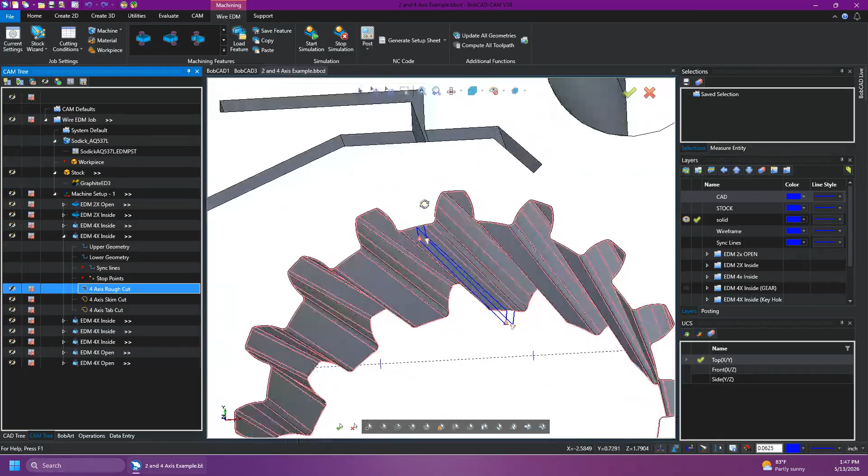And that perspective just got me a little bit, I was turning it the wrong way. So you can kind of see where it's syncing up just naturally without any sync lines being selected.

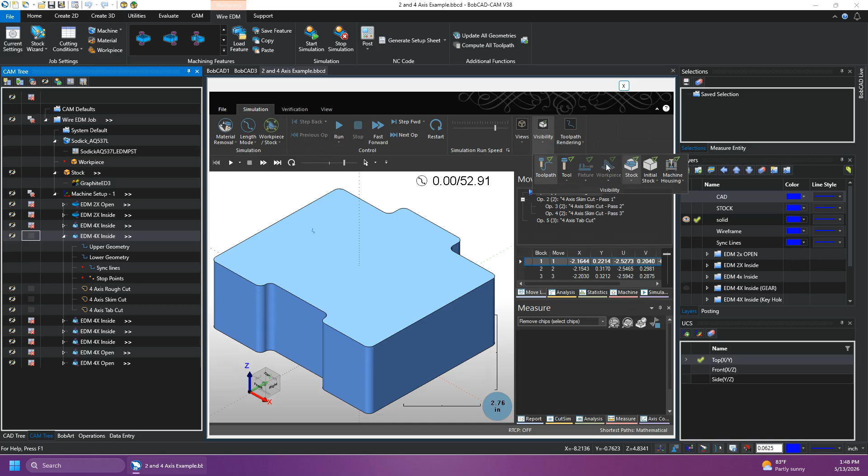We could go simulate that one too. Go run that. You can go through here, stock, transparent, and we'll run that. That was probably a little quicker than I could have seen it, at least. Play.

You can see as it's working through, it's making sure to keep those sync lines lined up, staying at that consistent angle. Don't worry about the choppiness of the render, this is the pre-render, and it will sharpen up once we get in there. We'll go take a look at that once it's all completed. We'll speed it up a little bit.

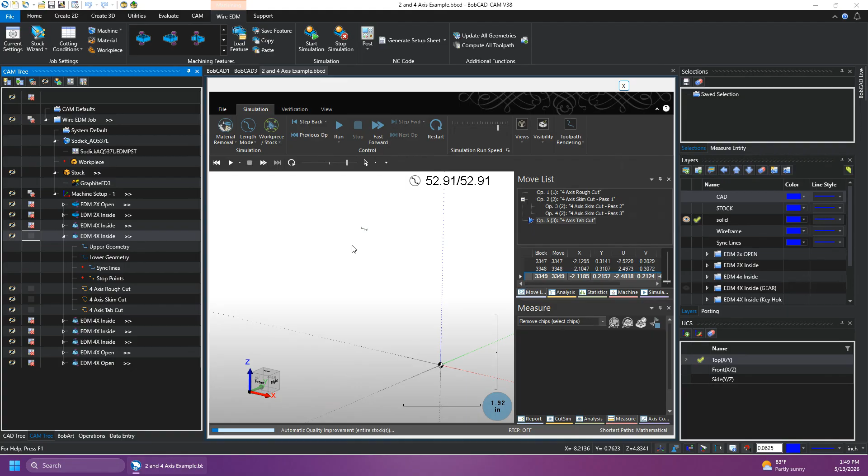We can get that one done with. We'll do our skim the opposite way. Turn our stock back on. Oh, and here, sorry about that. Just got rid of my part because I clicked my select chips button. Sorry about that. There we go. So we will get rid of our core there. That must still be connected in some way, I guess.

Are we doing our skim pass on there? That should be punching all the way through.

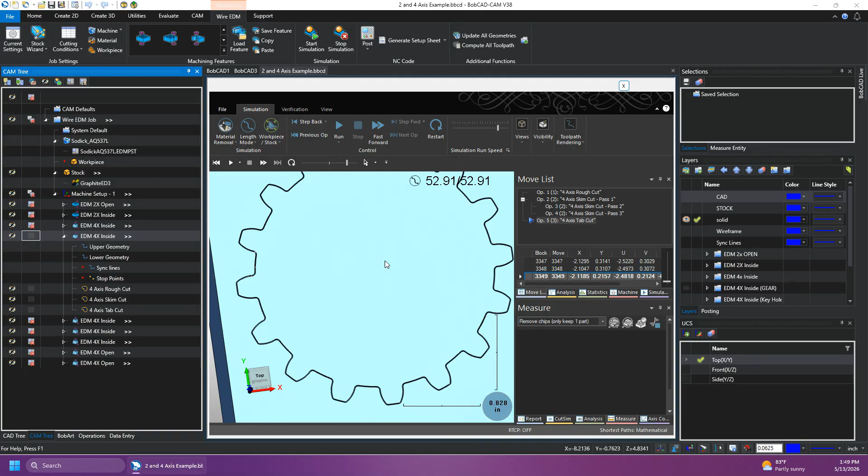There must be some contact surface in there making it not allow me to pick that. You can kind of see in that visibility when we were just looking at the transparent view that it is going through and syncing up. You can kind of see how that render looks.

I'll show you this real quick because we're getting to about 10 minutes left. I want to have time for a couple questions if anyone's got any. If we go look back at it, this is just another tip for simulation, because this could be concerning to some people. I've been asked about it plenty in tech support tickets myself. If we go run this...

You can kind of see the choppy pre-render. Here, let's go. I've dragged this out a little bit here. Let me just fix this up. There we go. For visibility, we will keep it transparent.

We'll go ahead and run this a little slower, maybe slower than that. Really what I'm trying to show here is that kind of lousy pre-render that it goes through. You can see it looks a little choppy there. It doesn't really look like a clean cut through there, and that's concerning a lot of the time because people think, wow, my finish is going to look like garbage if it ends up doing that.

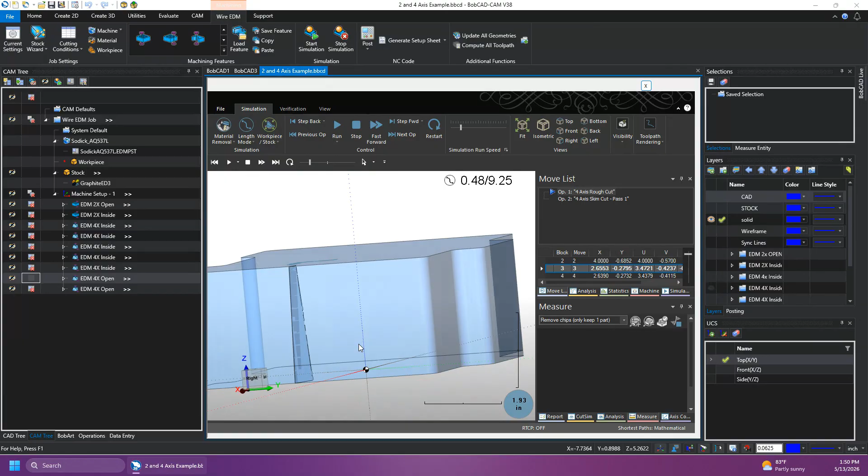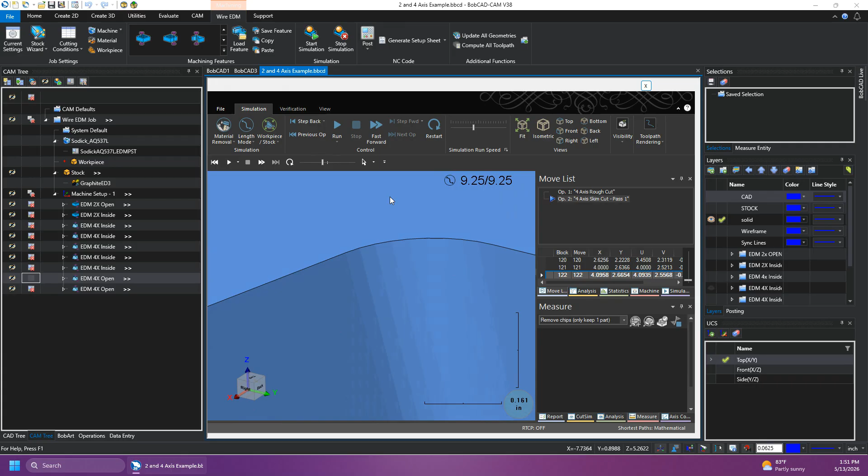If we continue through here, we'll speed it up a little bit, and we'll turn our visibility back on. We'll show that, and we'll only keep one part. A lot of times people get concerned because they'll see things like this where some features are a little more bold. But if you go into verification and get right into the corners here using my 3D mouse, get in there a little bit.

You can apply refinements, and that will refine the exact view that you're in. If we reset that, we can zoom out a little bit.

A lot of times the pre-render that you get is not going to be as clean as if you go refine that toolpath. This helps a lot of times if you're doing a milling job and you have a part with a lot of scalloping, because you're doing a large step over and you're not accounting for the scalloping of your part. This will show you exactly what those scallops are going to look like, and what you should expect to see when you pull it off the machine.

And so that's kind of the meat and potatoes of what I had to talk about today. Like I said, I know we have a few people in the session. If anyone's got any questions, I'd be happy to answer those.

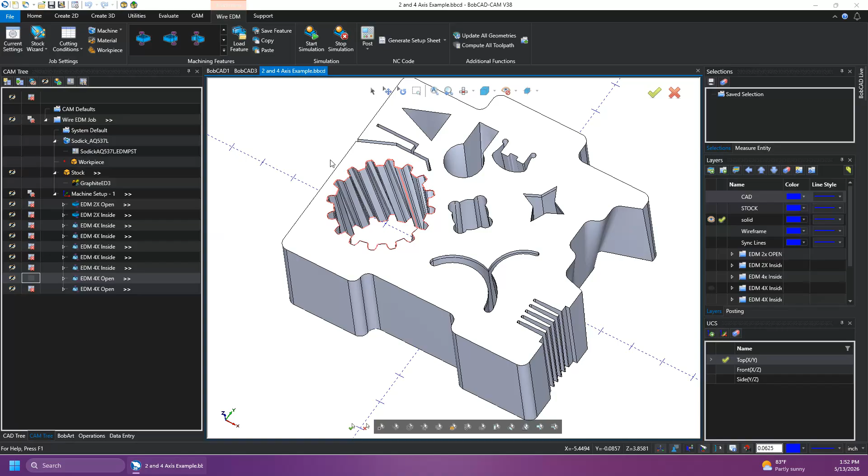Not getting anything here right now. We'll just give everyone a minute.

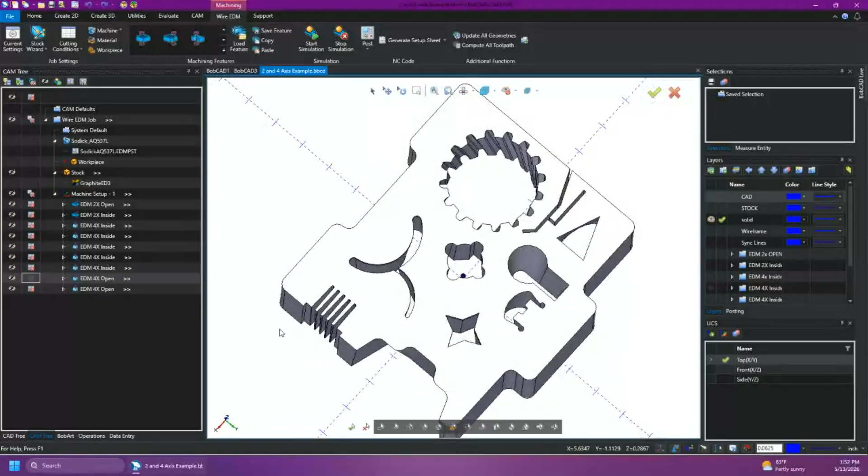If there are any questions that are eating away at you with regard to wire EDM... that was just a couple of these shapes. You can see you got this one all arcs, this one all lines. You can do some pretty neat stuff with wire EDM. The zero tolerance machining nickname is very applicable when it comes to wire EDM.

Don't have any questions quite yet. We'll give it another minute.